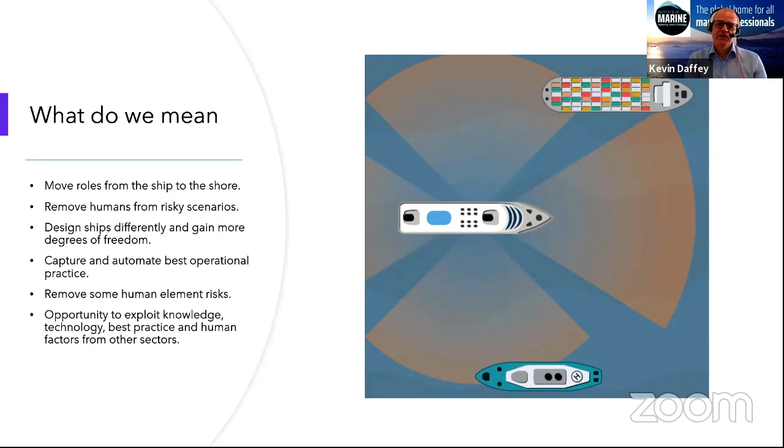And I feel it's an opportunity to exploit our knowledge, capture best practice, and we can do that from other industries. In the mining industry, mining trucks have been going autonomous for many, many years now, and we can learn from quite a risky sort of industry. Power generation, we've had remote working in power stations for a long time. Power stations have been controlled from central control stations. Rolls-Royce had some control stations for some of its gas-powered power stations for many years, operating from a control centre in Derby that then controlled power stations up in Newcastle and down in Bristol, and also in London. So, why not learn from other industries that are doing this?

And the automotive industry at the moment is doing a lot of work in autonomy. The medical industry is also looking at using autonomy to perform some sorts of surgeries. So we've got a lot that we can learn. And I believe that it's a really great use of human capital. We can actually begin to centralize some of our human capital into remote operating centers. And it's a good way in which we can actually utilize our human capital.

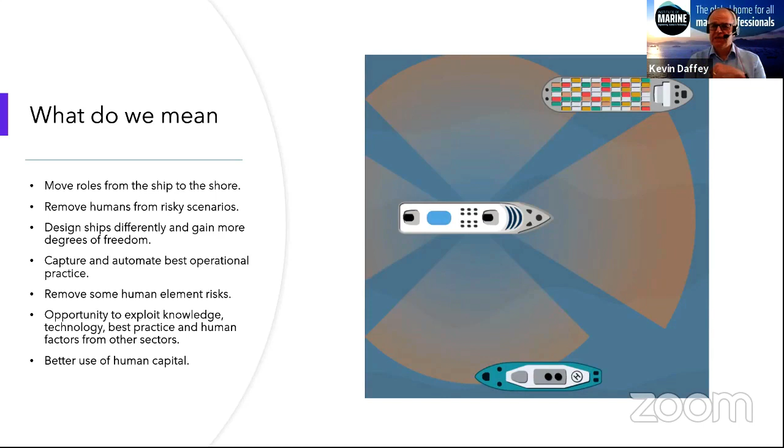And when we talk about autonomy, there's lots of different ranges of doing autonomy. Quite a lot of people think about robot ships and ships which are completely unmanned and have their own decision-making capability. Yes, that's one end of the scale. But there is a whole host of different applications of autonomy that don't necessarily mean complete automation. And there's been quite a lot of work going on into scoping, well, what are the different levels of autonomy?

So level 1 is quite often where we rely completely on the human. There may be some small amount of automation, but actually the human makes all the decisions and makes all the controls. Level 2 is where we begin to provide some insights to the human operator, and at that point, some of the decision making is still with the human, but more and more information is given automatically from data collection to that human being. Level 3 is where we start to give some of the automation some of the more regular tasks. If you think about this as your speed cruise control on your car, for instance, you convey that task to that on board your vehicle, but all the time the human can take control at any time.

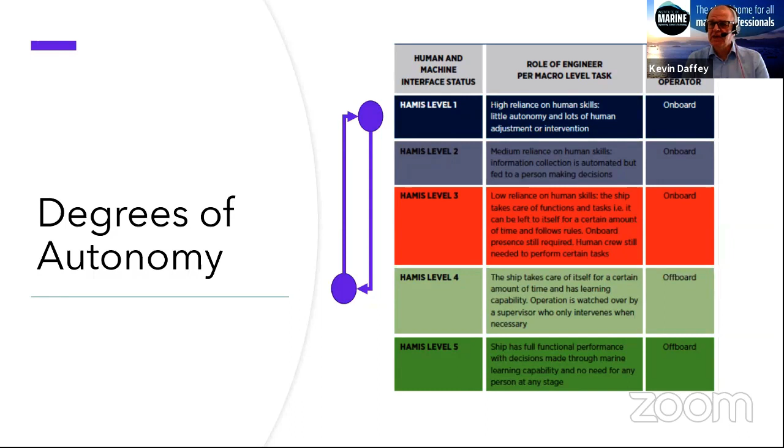And at that point, the pilot, if he's not really ready to take control, there's an opportunity for accidents to happen. So there's really quite a lot of activity we have to do to make sure that we can make this technology as safe and as reliable as possible.

Just to give you some ideas of the sort of the level 2, situational awareness is one of the key technologies that we need to make autonomy work. Situational awareness is where we start to use sensors to give us some idea of what's around us, to identify what's around us, and use that to give us insights into what it is that we can do about those targets, as it were.

One of the challenges in container vessels is the maximum height in which you can load in a container vessel. And SOLAS, for good reasons, means that you need to have a minimum line of sight visibility from the bridge for watchkeepers, and that's 2 ship lengths or 500 meters, whichever is less. And that will limit the amount of containers that can be loaded up at the forward end of the vessel.

But why not fit a situational awareness device at the very front of the vessel? And that would allow you potentially to then bring an augmented reality set of screens in front of the watchkeepers, who can ultimately see through those containers using the situational awareness package. They'll be able to see through weather conditions. They might be able to see more things immediately in front of the vessel as well. And it will provide insights to the watchkeepers in terms of what they do.

So, you know, this is a technology which is almost there. And actually, for less than $1 million, this sort of technology could be fitted. And the payback in terms of the additional cargo that can be carried can be made in probably a couple of voyages.

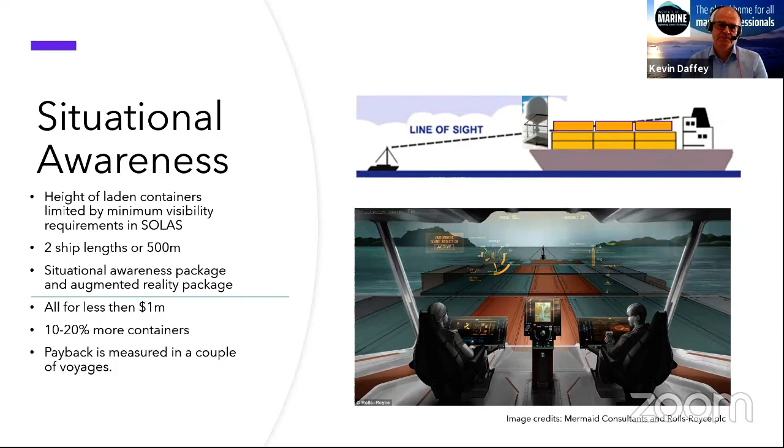A huge amount of activity has been going on in tugs, and the bottom graphic there is a project that I was involved with for a long time with Svitzer. It's the Svitzer Hermod that operates in the port of Copenhagen. And Svitzer came to the team that I was running at the time and talked to them about the opportunity to do a remote control demonstrator for one of their tugs.

And we took up the challenge, and within about 9 months, we kitted out a remote operating centre, and we actually operated a tug in the port of Copenhagen under remote control. There was a crew on board at any time that could take over. That was part of the regulations that the Danish Maritime Authority imposed on us. But again, we proved the technology, and we did a second set of demonstrations a year later, where we provided more automatic functions and a greater degree of remote control to the remote operator. And that project continues.

And there's been more work popping up over the last few months. PSA Marine have been working on a tug. Keppel have ordered a tug. ST Engineering have tested a tug in Singapore. And Robert Allan recently have been working with Abu Dhabi Ports, and the middle picture there is a graphic of one of the tugs that they hope to design and therefore build in the next 5 years.

You might ask yourself, well, why on earth do we want a remote control tug? You know, what's the benefit there? Tugs are not cargo carrying. It's a difficult application. It works in close confined waters with other vessels and other obstacles. Well, tug operations can be quite risky.

One of the questions is, is the technology cheaper? So part of the rush at the moment to do these technology demonstrators is to get the technology down to an affordable amount for CapEx. But certainly studies which have been done on the OpEx mean that there is quite a lot of big benefit here. And the fact is that this is now seriously being looked at and will be a technology that will be deployed in the next 10 years. I'm pretty confident of that.

Just carrying on with the theme of announcements, lots and lots of different regions around the world have been making announcements about investments in autonomous technology, even within the last 3 months. I just went through and had a quick look at the Marine Professional News and some of the other trade press. In Norway, ASKO Maritime have actually ordered 2 ferries, which are going to be operating in Oslo, which will be autonomously and battery powered.

In Japan, there are 3 different programs going on involving industry partners, with Mitsui OSK looking at container ships and ro-ros, putting investments, hoping to get autonomy working on some of their vessels in the next 3 to 4 years. A big program called DFFAS involves 22 different Japanese companies working together, designing the future autonomous vessels. Mitsui Shipbuilding are working with a ferry company to develop autonomous ferries as well.

Japan is an interesting region because it has a huge maritime history. Transportation on land is quite difficult. So actually coastal cargo is something which is really important to Japan. And actually automating it, making it green is a big theme. So there's actually a really big regional desire to move to using autonomous technology.

South Korea, again, is putting about $160 million into ocean-going remote control ships, really supporting its shipbuilding industry and its long history and pedigree of exporting to the rest of the world. The EU is not being left behind. The AutoShip program was conferred on a number of different companies over the last few months, looking at short sea shipping and inland waterways, also looking at developing shipping lanes.

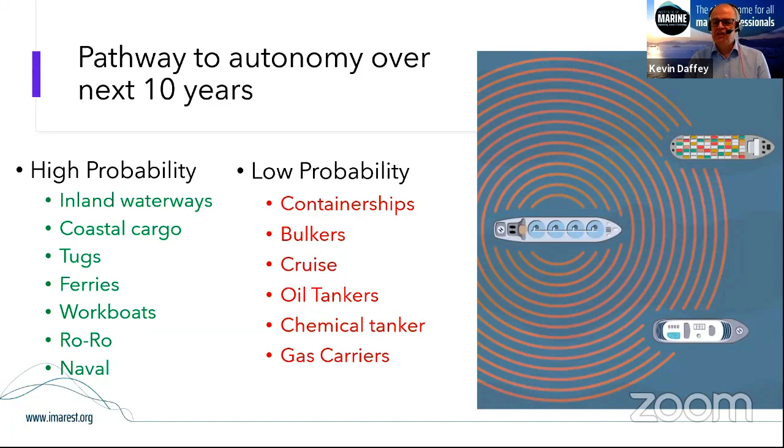So low probability by the end of the decade we'll see the larger ocean-going vessels with autonomy, but with high probability, because we're already beginning to see it, the technology is taking off in coastal waters and inland waterways.

Lots of challenges, and actually a lot of the challenges have been covered in this conference to date. So some really, really good presentations. I watched this morning Phaedra Gibson talking about humans and autonomy. If you've not seen that presentation, you will be blown away by some of the things that she's talking about.

The sort of mind and body interface to a computer, some of the drugs that could be used to enhance human performance in human behaviors, some really amazing things for the 2030s, 2040s and 2050s, and really discussing some of the issues around the ethics, etc.

Actually, where some of the challenges have been really overcome is in the offshore industry, and I was really pleased to see Fugro do a great presentation on their remote and autonomous operations that they've been doing in the offshore. So Etika Robrook, Shabin Hanif and Ross McFarlane gave another really, really good presentation on Wednesday, talking about what they've done. They've got 8 remote operating centres around the world. They've helped numerous clients around the world using these remote operating centres.

And actually COVID has been an accelerator for many of their clients moving towards this sort of technology to get things done in gas pipelines, oil platforms and other offshore facilities. So clearly there's a challenge around the human and machine. Watch the Richard Vye lecture if you want an opinion about autonomy and humans and machines.

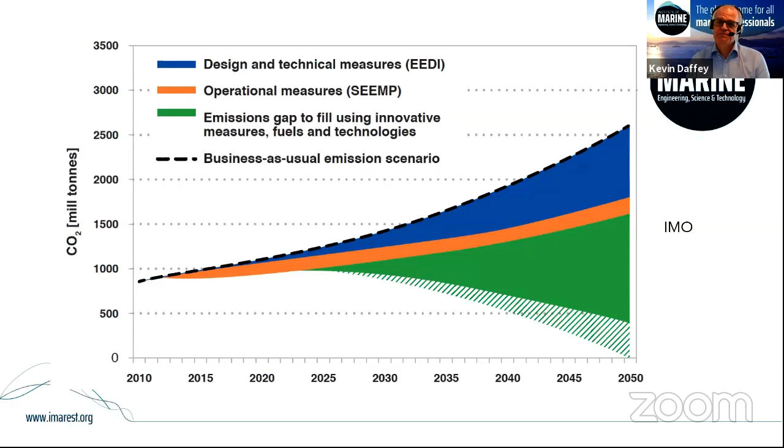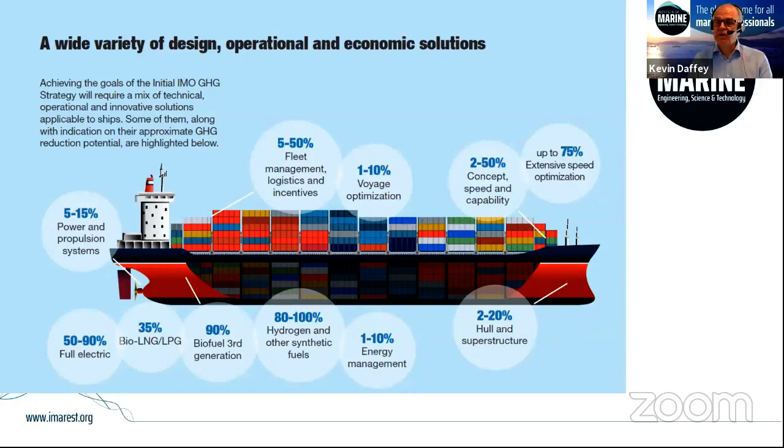But the big thing is that there's a big expectation in this green area from the IMO that technology somehow is going to help us get to this very ambitious target of halving the greenhouse gases, or even meeting the ambition of actually going carbon zero or carbon neutral by 2050. Lots of ways in which it can be done. I'm not going to go through this one, but again, I'd refer you to Madadh MacLaine and John Butler's presentation, where they actually took a view around how do I get shipping that is at what we call absolute zero, where we create no emissions in the operation of our vessels.

The class societies have been busily publishing lots of views around alternative fuels and efficiencies based upon them working with the equipment suppliers and the shipbuilders and their unique position in regulation. And this is going to be a real challenge for the class societies to stay up to date with all of this different regulation.

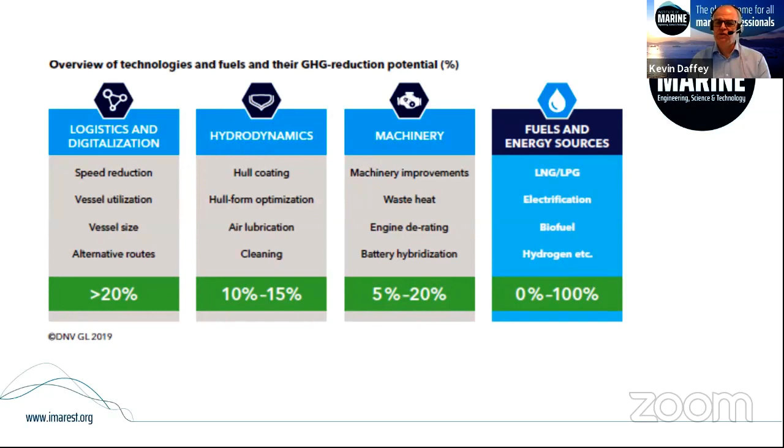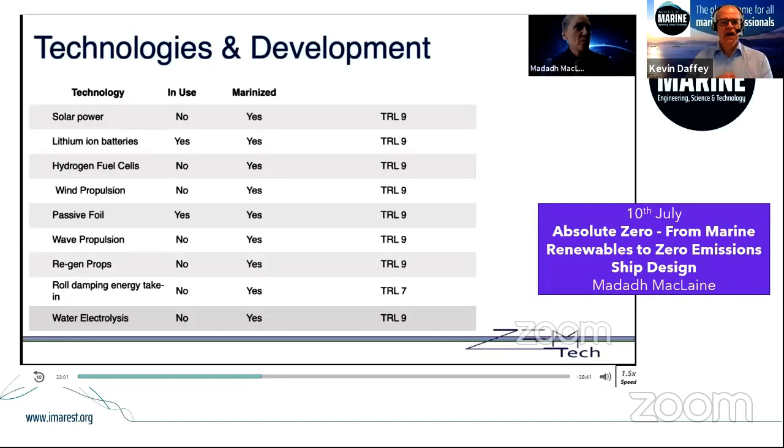Again, going to Madadh MacLaine's presentation, she went through quite a number of the technologies which are around at the moment. In her view, they are ready now, ready for deployment. So go and have a look at that presentation if you want to get some insight into some of the technologies, particularly things like foil propulsion, wave propulsion, water electrolysis, fuel cells, and solar panels for the marine industry.

Let's just have a look at one or two of them. One of the ones I'm quite excited about is hull air lubrication. It's a technology that's been around in some cases for over a century. People have already thought about, if I could run a vessel on a cushion of air, however I generate that air, it's going to reduce its friction and it will make it flow easier through the water. And you can do that in a number of ways.

You can inject an air film, which effectively is this diagram at the top here. You can have an air cavity like an upside down swimming pool underneath the vessel, or you can inject what we call microbubbles into the boundary layer, which effectively reduces the friction of the vessel.

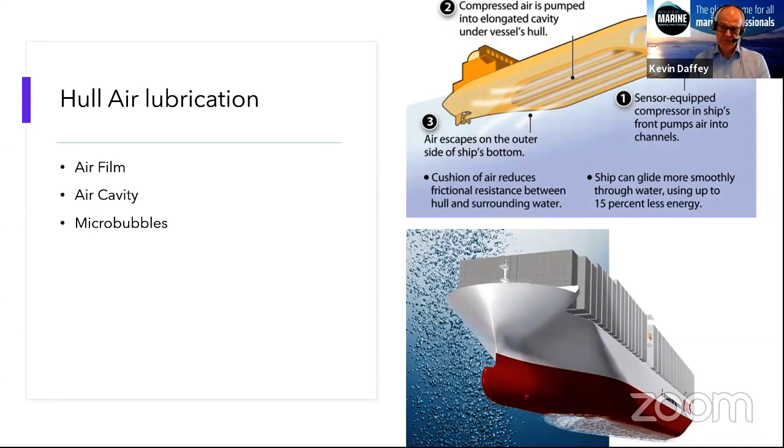And a company in the UK, Silverstream, have been pioneering this technology. And what's exciting is not the fact that they've done some demonstrators, it's the fact that they're now looking at completely industrializing this technology and actually selling it on large scales. And they did a deal last year with Wärtsilä to market this technology through their own sales channels.

So I can see this technology really taking off over the next few years, and the benefits are anything from 5 to 10% reduction in power for the same ship speed, and that could have a real benefit in terms of reducing fuel and reducing CO2 emissions.

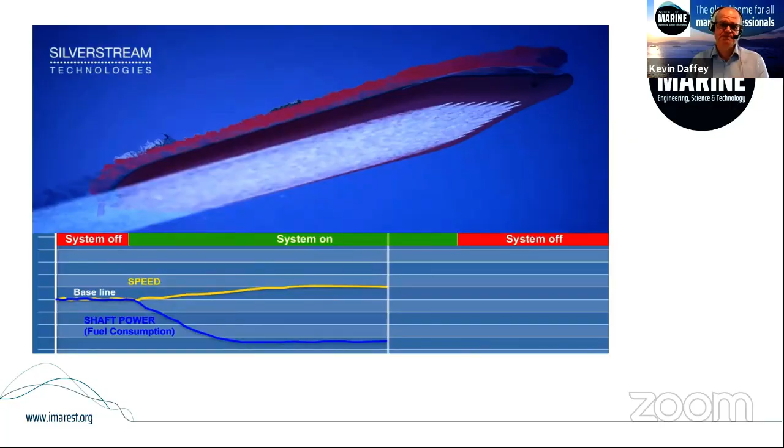Marine fuels. This is an area which is close to me, working for an engine manufacturer: really knowing which fuel is going to be the dominant fuel in the future. We've been very lucky there, we can develop the technology, but we are really at the limits of what we can do with diesel engine technology in terms of making it more efficient, reducing the emissions from it. It really is at the limits of what we can do in terms of a fundamental set of physics.

So there are lots of different marine fuels out there, and the challenge for both us that make equipment like diesel engines, and for the people that run and operate fleets and run ships, is knowing what is going to be the future fuel. And I think the next 10 years is really where we will see lots of discussion around it. We'll see the development of some of the fuels, but I think we'll probably hone in on one particular set of fuels that we will use for the future.

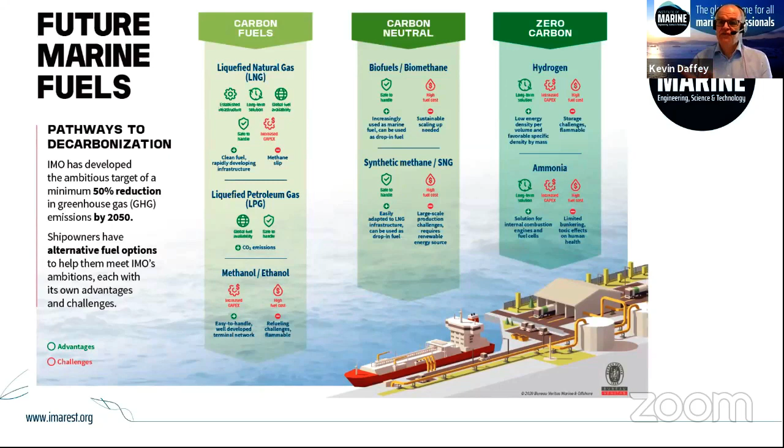Then you've got carbon neutral fuels. So these are coming from biofuels, where you're capturing carbon in plant material, you're creating a fuel from it, and then you're burning it. So the idea is the cycle is broken in some way, and synthetic methane is another one. And then you've got the pure zero carbon fuels, hydrogen and ammonia, where you're not creating any CO2 at all. But these only work where you generate the fuel from renewable sources. And we'll go into that in a bit more detail.

Power to X is a term that's being bandied around a lot at the moment. So this is where we use renewables to generate a whole host of energy and fuel types for different applications. It could be for mobility, it could be generating fuel, it could be for chemicals, it could be for power generation and heating. So this is where we take renewable energies, we can use it directly.

So for instance, if we look at Norway, it's using hydroelectric power to recharge batteries on ferries. The ferries do their transit across to the other port, they get recharged again. It's a power to electricity mode of transport. It's power to mobility, completely green, no CO2 emissions, and it's being used from renewable sources.

You can then go through an electrolysis process. You power electrolysis, you break down water, you create hydrogen, and from hydrogen you can then either use that as a fuel for heating or for electricity or for other things, or potentially you can use it to generate other fuel types like methane or chemical products or liquid products, as it were.

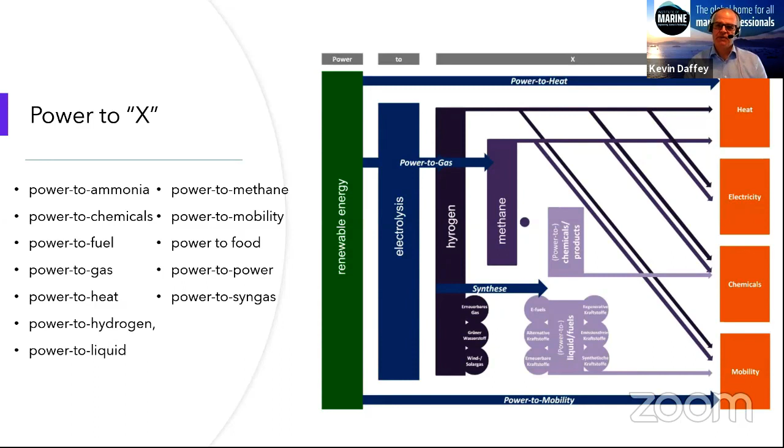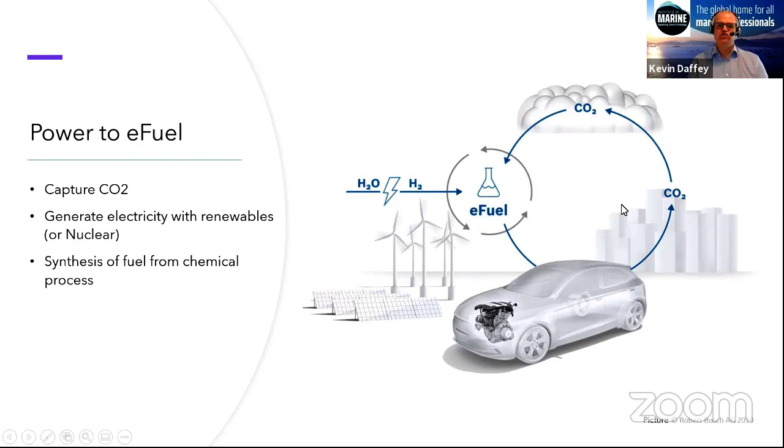Power to e-fuels, something that the car industry is getting interested in. You can use the normal reciprocating engine. You generate an e-fuel from a chemical process where you get hydrogen from renewables. You then get carbon capture, and you create the fuel, you burn the fuel, you create CO2, but you capture the CO2. So it's a sort of a carbon neutral approach to generating fuels.

What's got me really excited in the last 2 weeks is the announcement by the Saudi government and Air Products on the construction of this $5 billion world-scale creation of green hydrogen and ammonia facilities. It's going to be built in northern Saudi Arabia. The idea is that Saudi Arabia wants to become a net exporter of hydrogen to the rest of the world. It was unveiled a couple of weeks ago. It should be on stream by 2025.

It's going to generate 650 tons of green hydrogen using sun, wind, and water. Hydrogen is going to be extracted from the water. Nitrogen is going to be pulled from the air, combined with the hydrogen to create ammonia. And what they're going to do with the ammonia is use it for transportation. It's much easier to compress and transport ammonia. It's very similar to transporting LNG. You export that, and when you import it, you convert the ammonia back to hydrogen, and you can use it in any of the power to X types of mode.

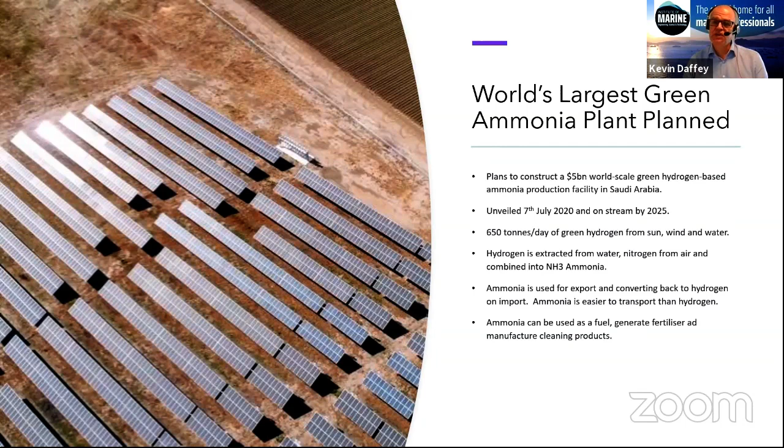And I think the fact that a big country like Saudi Arabia is doing this at scale means there's going to be an abundance of hydrogen and ammonia fuels, and that may be the game changer. That means that we then settle down on the two types of fuels that could be used in the marine industry over the next 10 years.

A number of other nation states are also racing to it, and this is the bit that really gets exciting. Almost every week, another nation is producing their hydrogen economy strategy. Germany have done it, Netherlands, Portugal, Norway, South Korea, Australia. Australia are looking to use Western Australia to go from solar to hydrogen. The EU have announced something like €50 million investment in electrolysis over the next 5 years, and then looking at investments in technologies to make a hydrogen economy up to 2030.

I was talking to officials from the Scottish Government about their hydrogen strategy. They're looking to move away from the dependence on fossil fuels in Scotland towards using hydrogen. Huge abundance of renewable offshore wind and tidal energy, which they've got excess of at the moment, which they could use to generate hydrogen. They're already powering all the buses in Aberdeen using hydrogen. They're thinking about using it for train mobility. And they're also talking to a number of players about, could we do this in the marine industry as well?

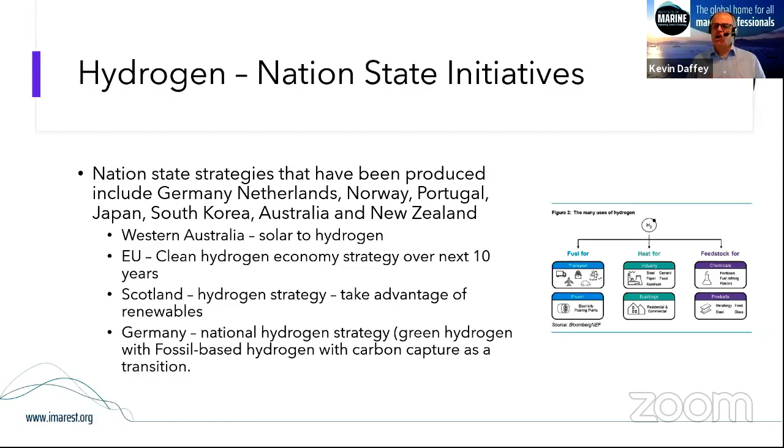And John Butler, one of our esteemed fellows, is looking at this in the North Sea, generating hydrogen from renewable offshore wind. Germany also produced its national hydrogen strategy. It's allowing a transition using hydrogen generated from fossil-based means, but it sees that only as a transition. And when one of the world's biggest economies actually moves towards using hydrogen, these are the sorts of game changers which will mean hydrogen will become abundant. The price of hydrogen will come down as well.

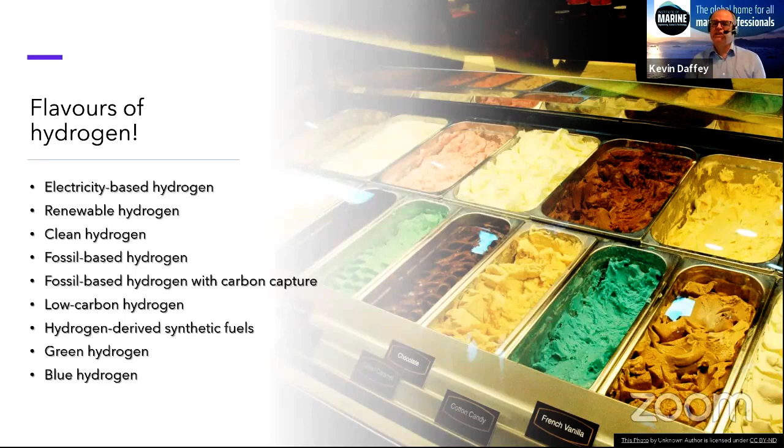Lots of different flavors of hydrogen. When people talk about hydrogen, they might talk about blue hydrogen, green hydrogen, low carbon, fossil-based hydrogen. The two that we're really interested in is what we call clean hydrogen or green hydrogen, which is effectively renewable hydrogen. Hydrogen generated from renewable sources, which means that it really is a carbon neutral, carbon zero fuel.

How are we going to use the hydrogen? There are two ways. The first one is using fuel cells. Again, fuel cells are not a new technology, but the recent announcement by ABB with Hydrogène de France, HDF, to develop the ABB and Ballard proton exchange membrane fuel cell at scale in megawatt units that could be used in cruise ships or container vessels is a game changer. When the big companies come along and start to industrialize this technology, we now have a pathway in which we can actually utilize this, and we can see this being rolled out at scale.

On the left-hand side is my own company. So that's one of my colleagues, Dr. Martin Teigeler, who signed an agreement with Daimler to take their fuel cells from the automotive industry, which they've been developing, very compact fuel cells. We're going to use this technology for data centers, for green energy for data centers, but we could use this on the smaller ships that we tend to provide power units for, like tugs and workboats.

And I think the fact that the huge series scale industrialization we see in the automotive industry, taking that technology, it will be lower cost, it will be ultra reliable, it will be ultra safe. Taking that industrialization is going to be a game changer for the marine industry.

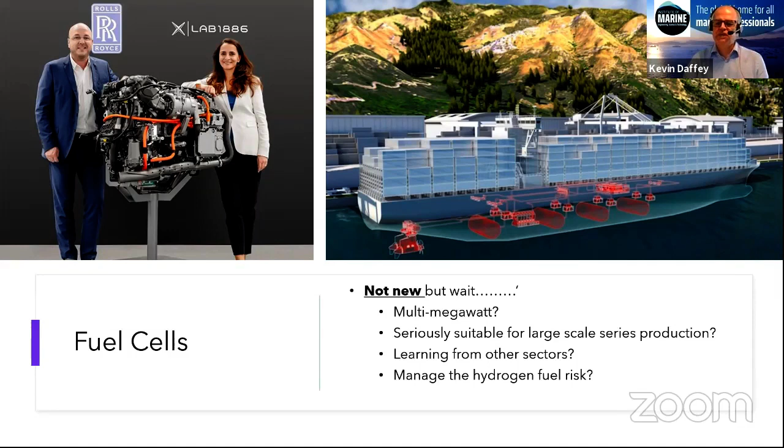You can also use it in reciprocating engines, and an interesting project going at the moment is Hydrotug, the world's first hydrogen fuel tug. This is a Belgian company, going to be used in the port of Antwerp. Hopefully, I think by 2021, it's not clear when it's going to be delivered, but effectively this is going to be a reciprocating engine which is going to be burning liquid hydrogen. I'm quite interested in this, being a reciprocating engine person. We've had a single cylinder test demonstration using hydrogen.

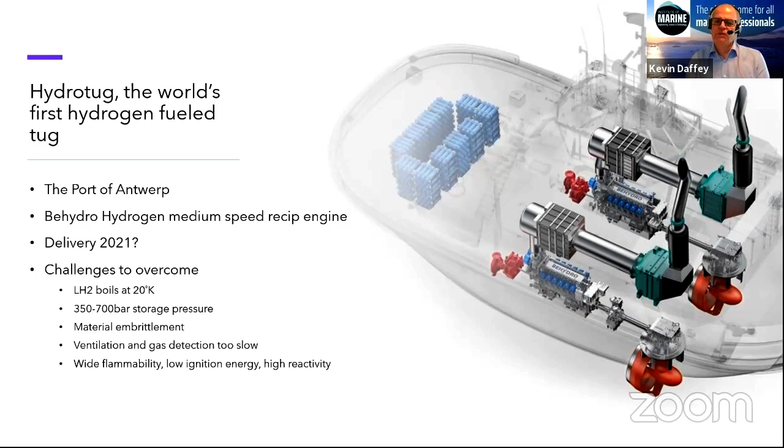There are some challenges with hydrogen in liquid format. You have to cool it down to less than 20 degrees Kelvin. You store it at quite high pressures. At very, very low temperatures, you can get embrittlement of material, which can make the injector technology quite interesting. Also the safety of it, ventilation and gas detection can be quite slow. So it might lead to an explosion, very wide flammability. So there's a number of challenges to be overcome when we put this into the marine industry, but that's not to say we can't do it. So this is an interesting project to watch.

And just another interesting variation of wild and wacky technology. Why can't we just capture the carbon and freeze it and then just sink it to the bottom of the ocean? So you can burn conventional fuels or any of the newer fuels, the e-fuels coming out. And a company, or a consortium of companies, called Decarbon Ice are genuinely looking at this. They're looking at building cryo units, condensers in the exhaust of conventional engines using a cryo cooler, creating dry ice effectively, shaping the dry ice, and then dropping it off the back of the vessel.

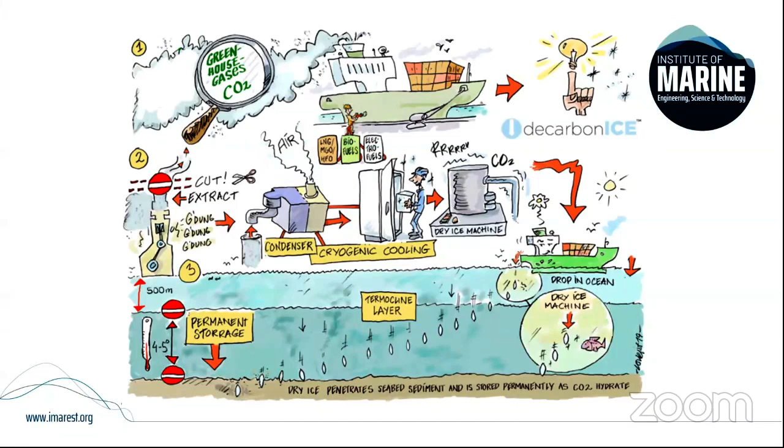It will sink because it's heavier than water, and effectively that dry ice penetrates the seabed and it's stored permanently in the seabed as CO2 hydrates. I have no opinion about whether this technology will work or whether it's the right thing to do. But again, people are looking at this sort of innovation, and maybe this is a quick way of cleaning up existing vessels.

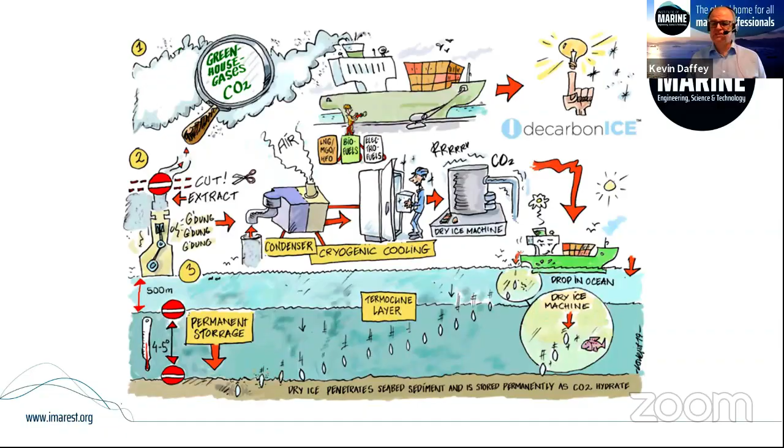The sort of penultimate topic I'm going to talk about is artificial intelligence. And it's quite an interesting area. I've set up a working group to look at artificial intelligence within the IMarEST, because I feel that there's a huge amount of benefit that we can get as an industry from this technology. And it's all around us. Every day you are interfacing with artificial intelligence. Artificial intelligence is used for sorting your emails, for getting rid of spam, authenticating emails, for instance. If you use Gmail, it's using artificial intelligence to look at your emails.

If you go to Facebook or Twitter or any of the social medias, your posts will be arranged based upon the artificial intelligence knowledge about what you like. It puts the right adverts in front of you to maximize your desire to buy those products. LinkedIn uses it to try and match candidates to job adverts. When you interface with people like travel agents, or you book your hair appointment online using chatbots, this is artificial intelligence. Facebook is also using it to detect from the posts that people make whether people are at risk of self-harming, and actually using it to alert mental health services in some countries.

Probably the biggest use of artificial intelligence is web searches. Amazon product recommendations are also doing it. Probably the most interesting one is the fact that many of us use Netflix, and 80% of what you watch is down to the recommendations that Netflix artificial intelligence has put in front of you. So actually Netflix knows what you want to watch, and it's enabling you to watch those things. So again, is it chicken or egg? I don't know.

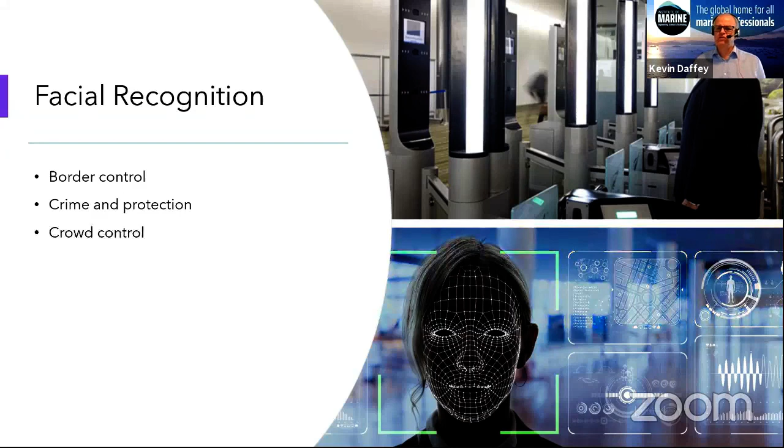Lots of predictions on what AI will do over the next 50 years. There are predictions that maybe around about 2050, artificial intelligence will get so intelligent that it will be able to take on and be better than any other human being at their task. And it's certainly getting quite good at playing games. It can do facial recognition better than human beings. It can begin to create dictionaries, languages, and certainly over the next 10 years, we're going to see a huge amount of investment in artificial intelligence.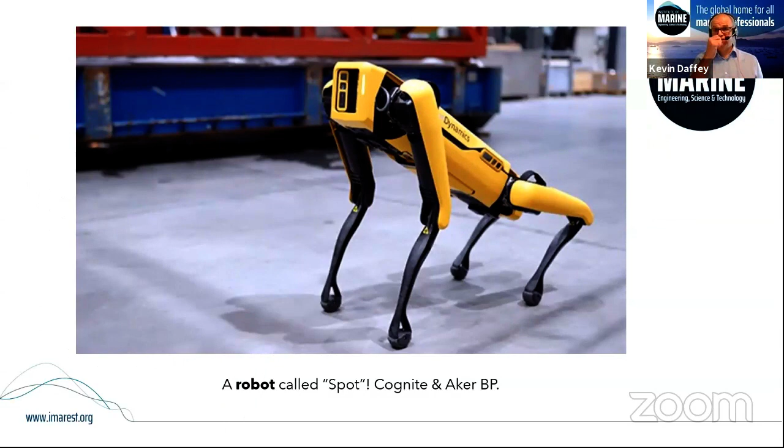Robots could be another area where artificial intelligence comes together. This is just something that very recently was on the Marine Professional News. Spot, and it's a robot by Cognite and Aker, and it's being used to capture high definition videos and take readings in inaccessible or dangerous parts of offshore platforms.

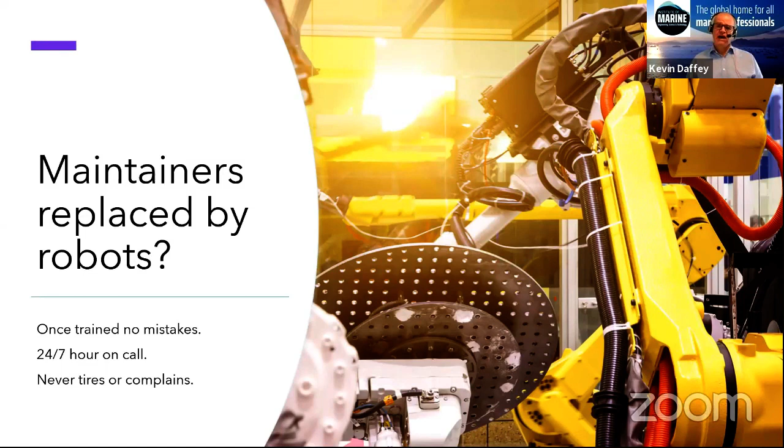Why can't we use robots and artificial intelligence to replace maintainers? Why can't you put a robot down into the machinery space? Once it's been trained, it's not going to make any mistakes. It's always going to be on call. It's never going to tire. It's never going to be complaining. It doesn't need shore leave. So, you know, there is no reason why in the next 10 years we can't see the deployment of some form of robotics to help us in the machinery space.

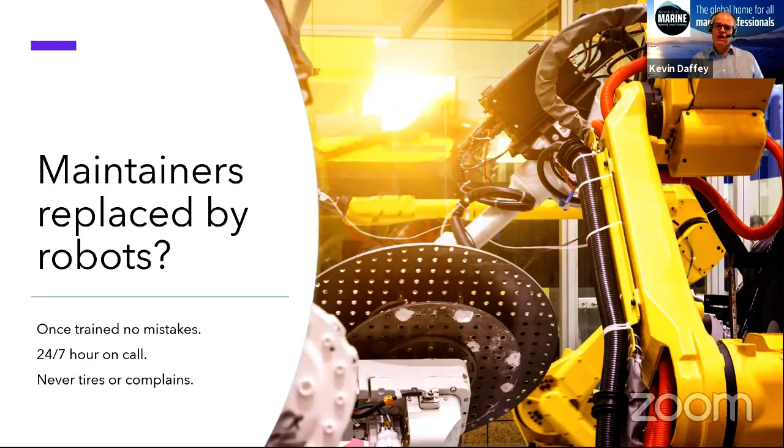If we look at automotive, we use robots to help operators to do complex operations or to do heavy lifting. And this could be one of the areas where we get collaboration between robots and humans, maybe in the machinery space or the maintenance alongside. But of course, who's going to maintain the maintainer is the obvious question. If I don't get asked that question today, then there's something wrong with the audience. But clearly, there is always going to be the problem of who's going to maintain the maintainer.

So what are the challenges around artificial intelligence? So first of all is having the IT and the communications infrastructure to get data around to actually utilize it in the marine industry is going to be quite interesting. How do you certify it? It's designed to be non-deterministic. It's designed to change in terms of its behavior. How do you go about certification?

And that's part of the subgroup that I've asked Bernard Twomey to run for me, getting some experts in the industry to get a position for the IMarEST to look at certification in the marine industry of artificial intelligence. And this comes back down to trust. How can we trust it? Are there biases? How can we explain how it works? Because if you're going to certify it, you need to better explain it.

How do we test it? Data quality is another issue, you know, getting the right data in, the right amount of data, the right units, the right readings. That is going to be a real challenge for artificial intelligence. And developing new expertise of how to handle it and the methods to do it and the software tools and the frameworks that go around it.

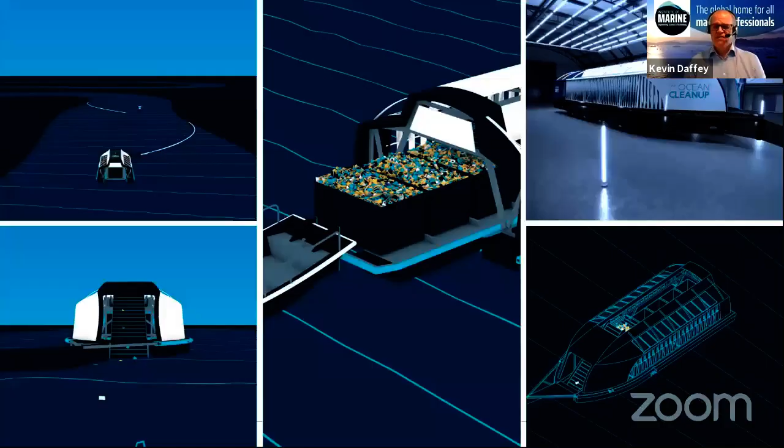And an interesting technology I picked up is the Ocean Cleanup, a company based out of the Netherlands, which is aiming to clean up 90% of the ocean's plastic. And this is a great project, and they're building these sort of scooping up ships, which are completely solar powered,

And finally, I can't really be president and not talk about the people that make up our technologists, our scientists and marine engineers, and the impact over the next 10 years. A great area, I think, where we're going to be able to bring skills from other industries is remote operating centres.

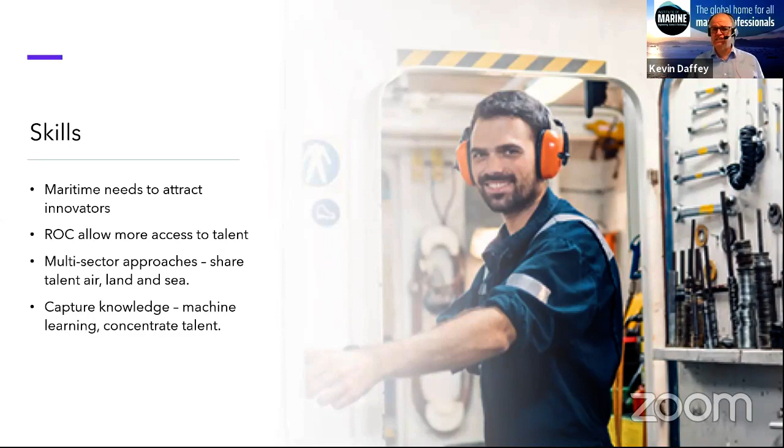With fewer talented people available dedicated to the marine industry, how do we capture that knowledge? Things like machine learning and artificial intelligence will allow us to capture that knowledge. But one of the key things is dealing with change, and that's a topic which I think we could do a lecture on its own, just dealing with change in the industry. I mean, COVID-19 has created a huge foundation for change. Many of us didn't realise how useful remote technology was, remote communications, home working was.

We didn't believe that we could do it, but we've been forced to do it, and we did it very, very quickly. There's going to be a huge amount of change in the industry around the different fuels that we use, how we handle it. There's going to be huge change around the level of automation and the number of jobs which are going to be at sea versus the number of jobs which are going to be on the shore. And that's going to potentially bring profound mental health challenges in the marine industry.

If there's fewer people on board a ship, maybe people feel that they're lower skilled, their skills are not really required because the real skills are in the remote operating centre. So again, how are we going to deal with the change? How are we going to convince people that they still have a good career when they go to sea? So, this is a topic which I think we could probably discuss for many hours.

My plea to you as marine engineers who are members of the marine science and technology community, you're members of the IMarEST, is you've got access to the special interest groups. And my big plea to you today is to actually contribute to this technology debate, help steer it, and help shape our industry by getting involved. The more people that are involved in our special interest groups, the bigger the voice that we can have. Remember that we have NGO status at the IMO. We are big influencers. When we make statements of the IMarEST, it has impact, and you can do that through any of our special interest groups.